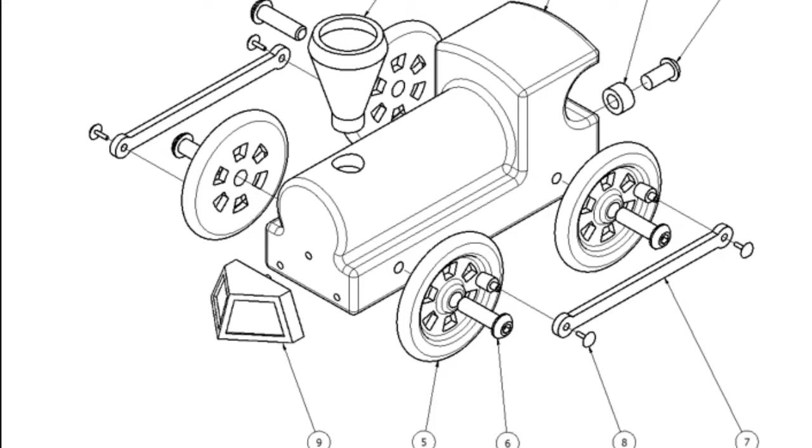Open up a new part in Inventor.

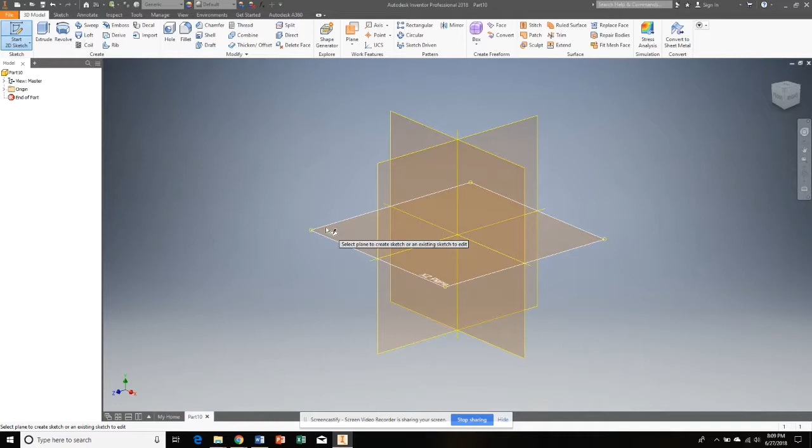Alright, so now we're going to create the linkage arm. This one is pretty simple. It's just two sets of circles on either end of a rectangle. So I think on this one, I'm starting a new sketch. I'm going to do it on the XZ plane so that I'm looking down on top of it.

And I think this one to begin with, I'm going to start with my rectangle, and make it the correct dimensions, 0.25 and 3.5.

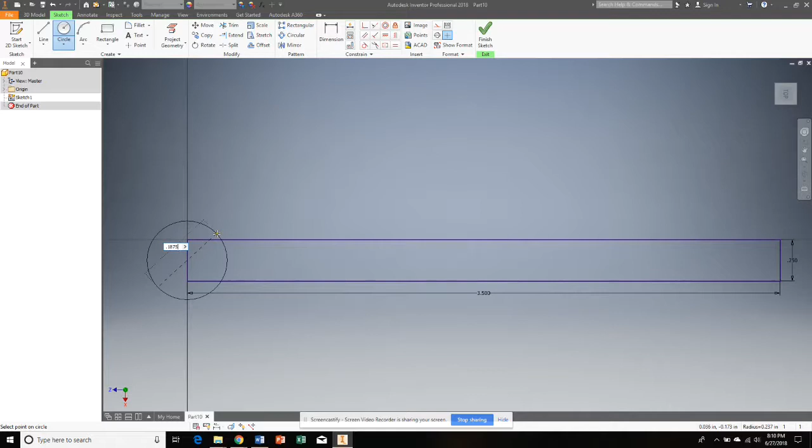Zoom out a little bit. And now I'm going to put two circles centered on each side. So I'm going to take my circle tool, find that center point, and the first one, the big circle, is going to be 0.1875, but that's a radius times 2. We need it to be diameter. And then there's a small circle inside of that, and that small circle is 0.128.

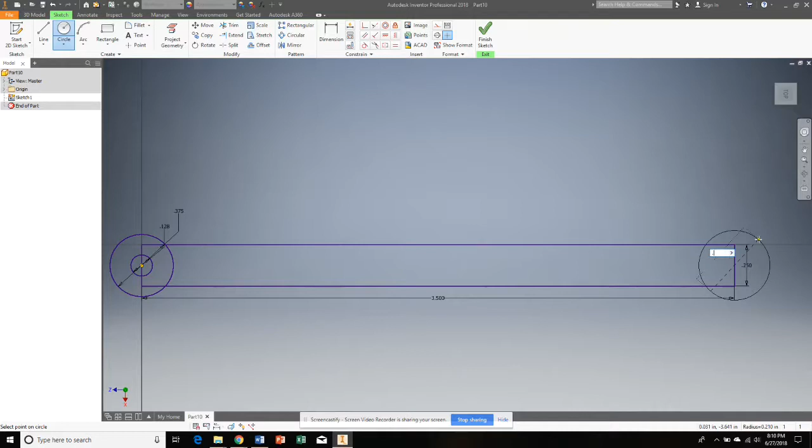Enter. And then I'm going to do the same thing on the other side. Find the center point, and say 0.1875 times 2, and then the small circle is going to be 0.128.

And so now all I need to do is go back in and trim. Now it's probably not going to let me trim everything. I don't want to trim this center circle. I just need to get it to where it's not letting me trim everything. But if I can create—oops, let's undo that one. I don't like that. If I can create that shape, it'll go all the way around as long as it's one shape all the way around. And so I think I'm good there.

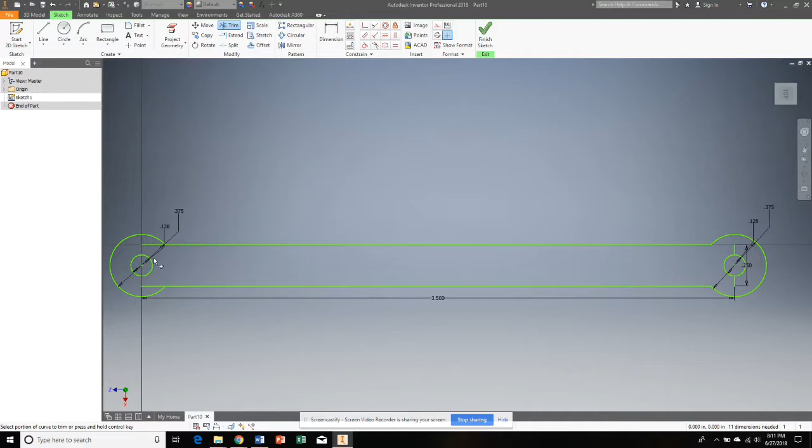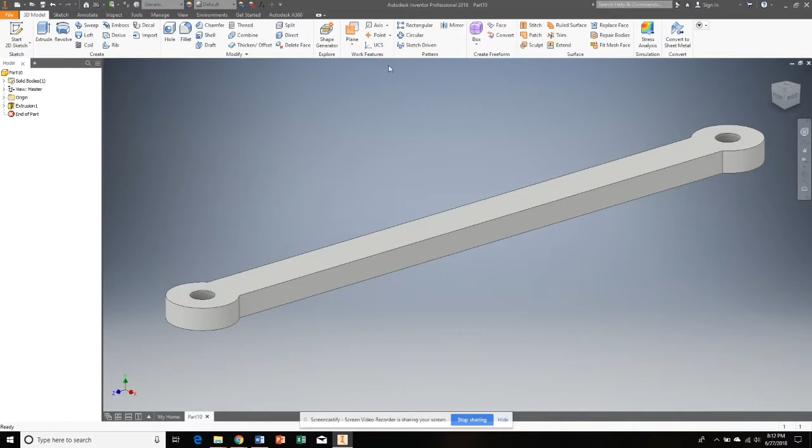I'm going to finish my sketch, center it, extrude. I want that surface. I want to bring it up 0.125. And if I look at it from the top, it looks pretty dang good.

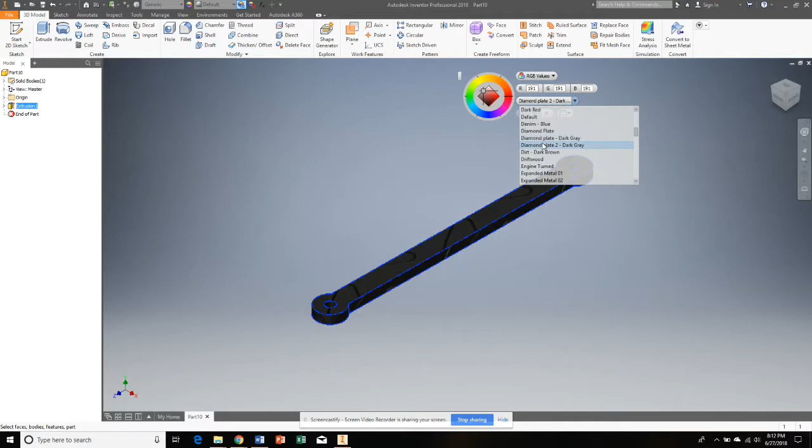Last thing I need to do is give it some color. On this one, I think one extrusion is the whole thing. I think on this one, I want to give it some cool diamond plate shaping. Maybe give it a little bit of a green yellow tinge. I think that looks pretty good. Pretty pleased with that. Say okay.